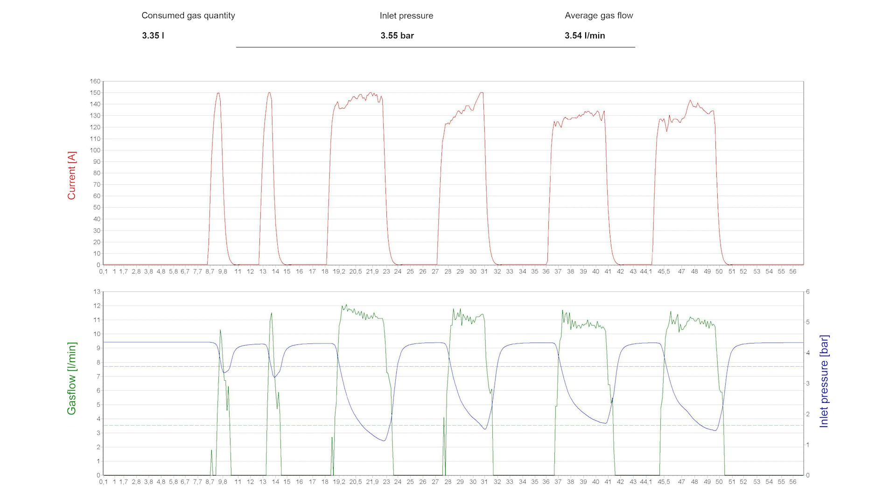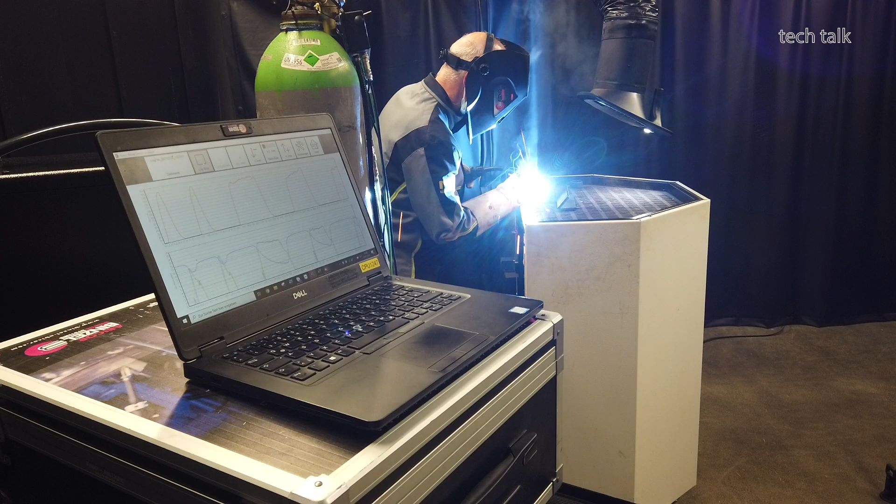But the main effect is that with using these systems, you detect the welding amperage at the welding power source, and the system now regulates the gas flow proportional to your welding current. That means if you weld with 350 amps, you work with 12 liters per minute. If you work with 150 amps, it automatically goes down to 8 liters per minute without any need for the welder to do anything. And this ends up in savings of 50 to 60%. So that's a huge advantage. So you also have a payback if you use these systems for manual welding.

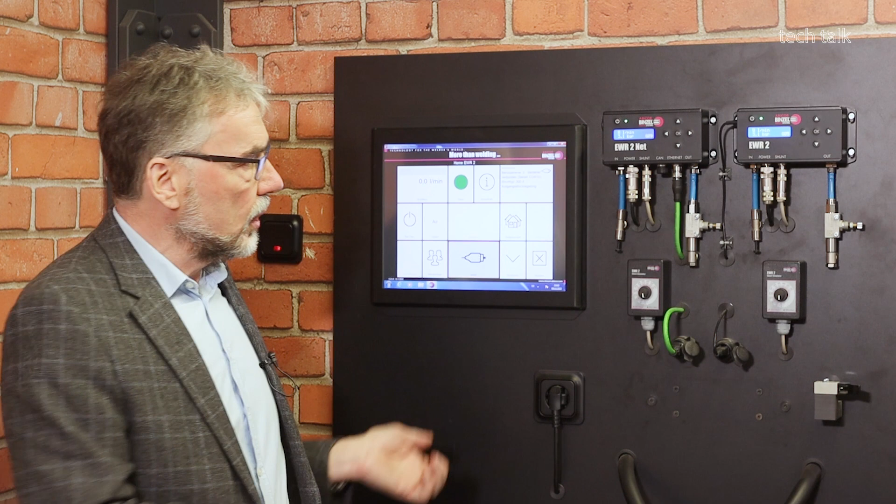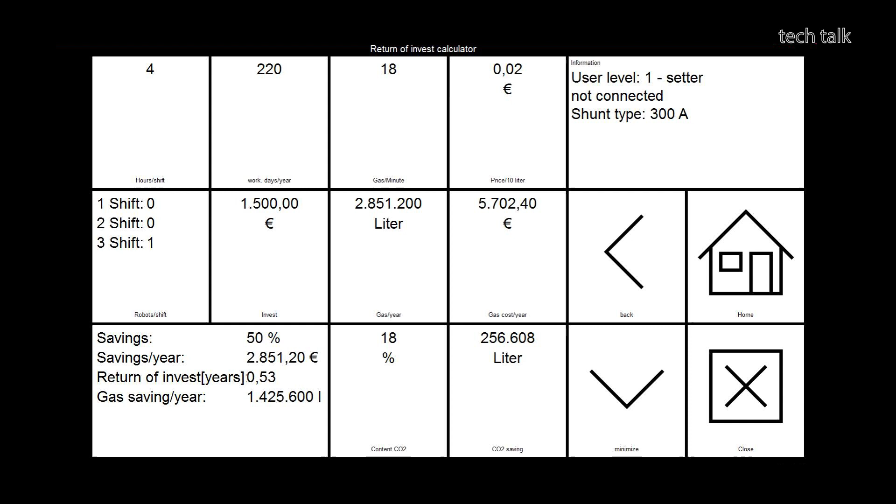For automated welding, robotic welding, you can do some more things. You can have an interface. You can detect the gas savings live on your computer. You can send the data via internet to a cloud. So this is this EWR2 net system that is Industry 4.0 capable. So even if you are at a remote location, you can still watch and witness your big gas savings. So there are a lot of possibilities, but to really get the highest savings, we would recommend an up-to-date gas management system.